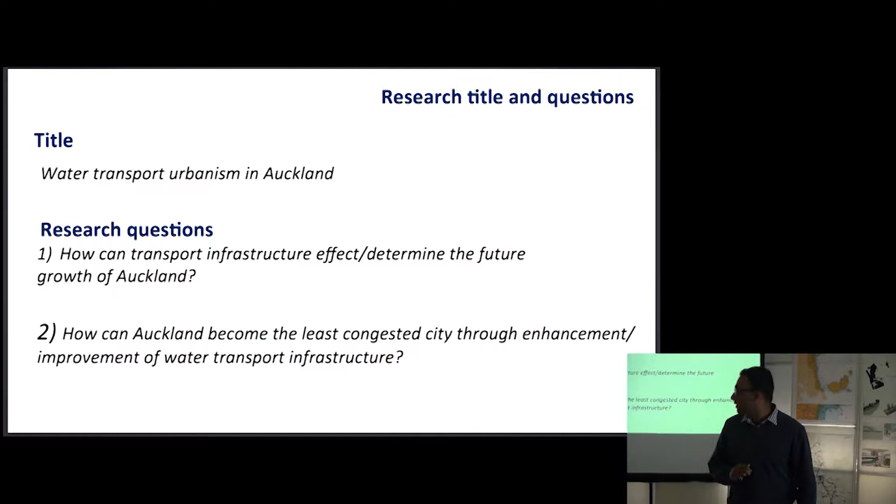My research questions are: how can transport infrastructure determine the future growth of Auckland, and how can Auckland become the least congested city through enhancement of water transport infrastructure.

This project aims to gain knowledge about Auckland's infrastructure network, to understand the future growth of Auckland, to find relevant precedents, to develop a methodology using network analysis, to analyze the coverage of transport, to design a speculative water transport technology for the Auckland Gulf, and to design a new transport network plan for the site.

Let's look at the reasons why this research is necessary. Auckland is located in the North Island of New Zealand. It's the most populous urban area in the country, with a population of 1.4 million, which is 31% of the nation's total population. It contains more water than land, and it's one of the most livable cities in the world.

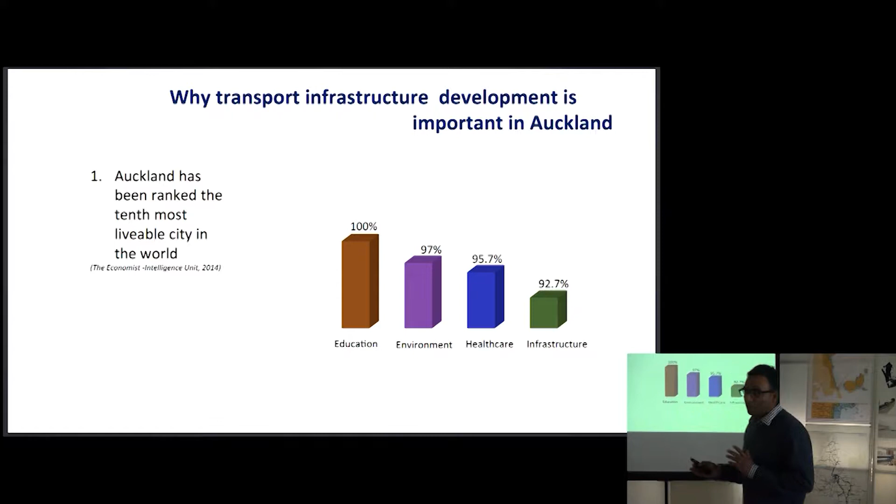Auckland has been ranked the 10th most livable city in the world. The Economist Intelligence Unit released its report on 140 cities, and for the 5th time in a row, Auckland was in the top 10 in 2014. Auckland scored a perfect 100 for education, 97 for environment, 95.7 for healthcare, but only 92.7 for infrastructure. Due to this, Auckland is behind 9 other cities.

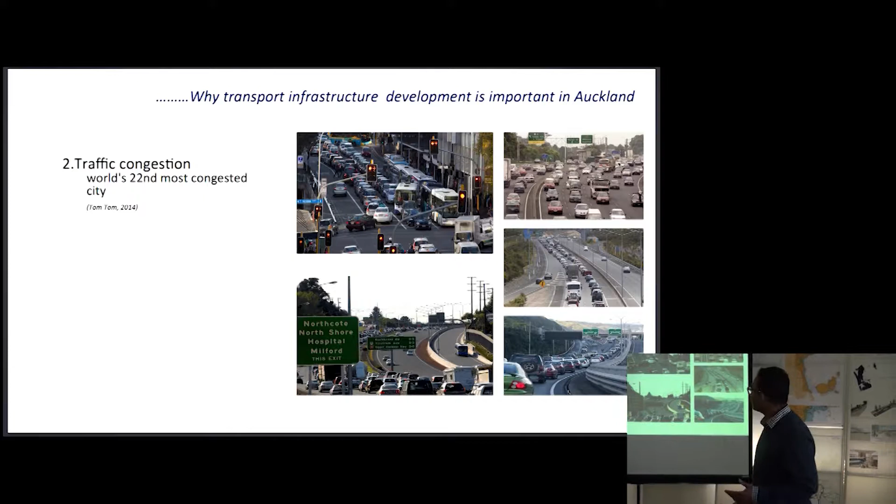The second reason is traffic congestion. In a 2014 survey of over 138 cities across 6 continents, vehicle navigation firm TomTom found Auckland to be the 22nd most congested city in the world. A driver who commutes 30 minutes a day faces 89 hours of delay every year going to and from work.

The third reason is poor transport network in many rural and coastal areas. The fourth reason is the Auckland Transport Plan—page 42 indicates that the future role of ferry services within the new network is in need of further review.

So I have found some methodology to address this problem. My methodology at this stage includes: literature review of different theoretical views, case studies of relevant precedents, stakeholders' current and proposed plan review, site selection of the potential site, and design of the site with reflection.

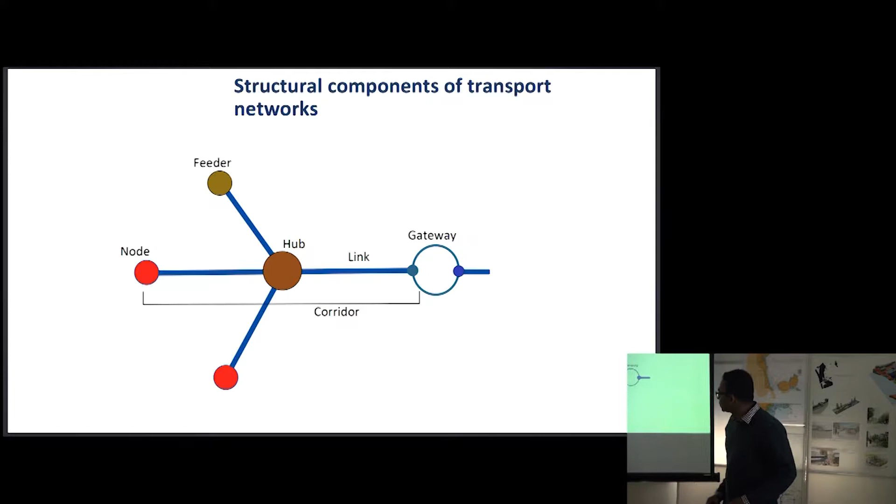Transport can also be studied from a network viewpoint. Before looking at Auckland's current transport pattern, looking at network theory makes it easier to understand Auckland transport from a network viewpoint. This is the structural component of a transport network: feeder, hub, gateway, and corridor are part of the structural components beyond the nodes and edges.

At the same time, random and scale-free networks are quite popular in transport. These are utilized when transport forms a complex network. Random networks mean a fixed number of nodes connected by random edges, and as they involve more edges and nodes, growing from small to larger, it's called a scale-free network.

There are 3 general network models: centralized, decentralized, and distributed. Centralized networks concentrate the power in one individual unit. Unlike centralized systems, decentralized systems distribute the power among many units. The distributed network has no center point—it doesn't depend on a center, which is the major advantage of this network.

Now it's easy to look at Auckland transport from a network viewpoint, since we've already covered the theories. These are the places where all the nodes and edges are located under the current and proposed 2018 and 2025 transport network.

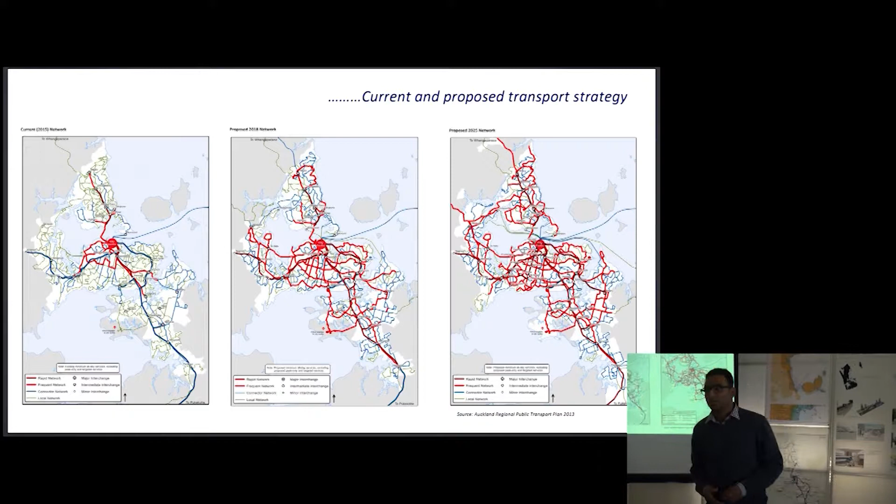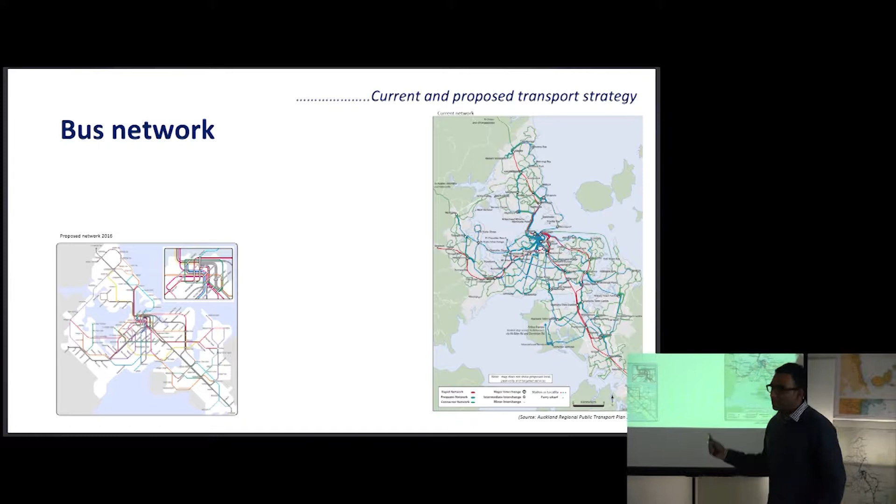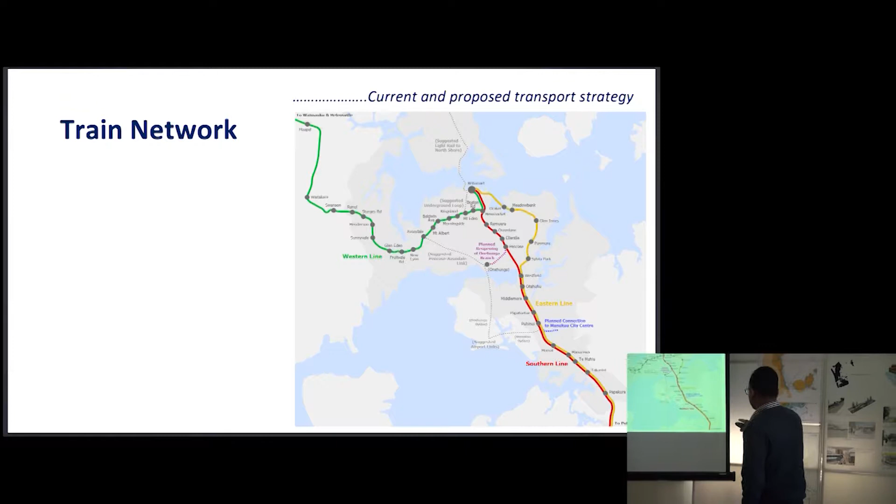The bus network takes the leading role in Auckland public transport. It's formed with 13 major interchanges, 24 intermediate interchanges, and many minor interchanges. The second biggest public transport system in Auckland is the train, formed with 48 train stations all over Auckland, including 16 train stations from Papakura to Britomart.

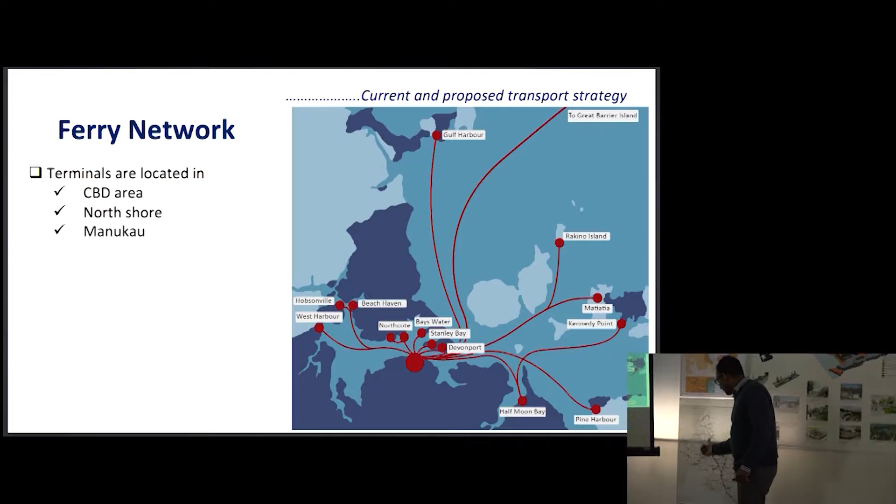Ferry transport development, or water transport development, is the priority over other transport development. There are many reasons behind it. First of all, Auckland is a linear city surrounded by water. It contains more water than land, so creating more nodes through water transport is practical and appropriate.

As Duany says, trying to cure traffic congestion by adding more motorways is like trying to cure your obesity by loosening your belt. The second reason is the booming demand for future ferry services.

For example, Half Moon Bay and Devonport ferry terminals. The third reason is that many cities around the world are successful in water transport. Therefore, I have been looking at how water transport has been handled around the world. Good examples are Sydney, Australia, San Francisco, USA, and Vancouver, Canada. These places have many similar conditions to Auckland, and they have grown through water transport infrastructure.

In particular, Sydney is the main business city of Australia. The only practical way to travel around the CBD area is by ferry. Therefore, ferries carry 14.7 million passengers every year. Successful water transport drives healthy urbanism as well.

Let's have a look at my design method. My design method will adopt many network models and theories. It will also take into consideration the existing ferry and other transport networks, potential sites for new ferry terminals and residential zones, EVs, and stakeholders' proposed plans.

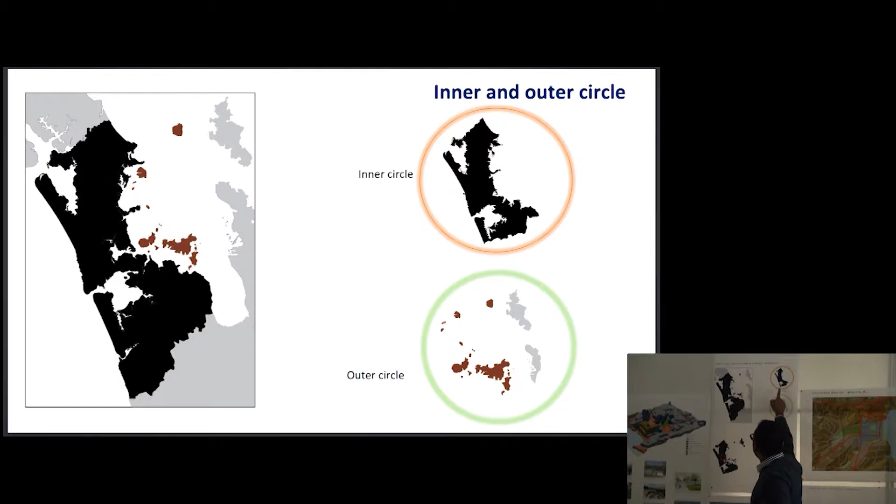My design is going to be under 2 zones: the inner circle and the outer circle. Places that have direct land connection with the CBD area go under the inner circle. Places separated by water go under the outer circle.

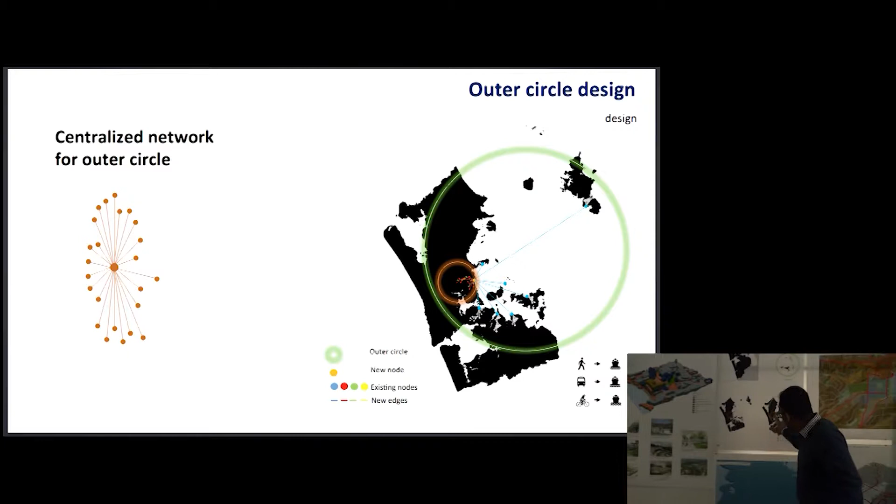As I mentioned earlier, when a smaller network needs to be expanded into a larger network, a scale-free network will be utilized. Therefore, scale-free network is the tool for the inner circle. The outer circle only focuses on connecting new ferry nodes with existing ferry nodes, so a centralized network is the tool for the outer circle network.

When our network gets wider through water transport infrastructure, equilibrium will be created in most cases. Equilibrium means more route options for passengers.

My site selection has been finalized after analyzing many things, including the general and special requirements for a ferry terminal and the stakeholders' current and proposed plans. Browns Bay is my site. This is one of the suggested ferry terminal locations by Auckland Transport and Auckland Council. It is located in North Shore and close to Albany as well. It has all the potential to grow into the biggest city through transport enhancement.

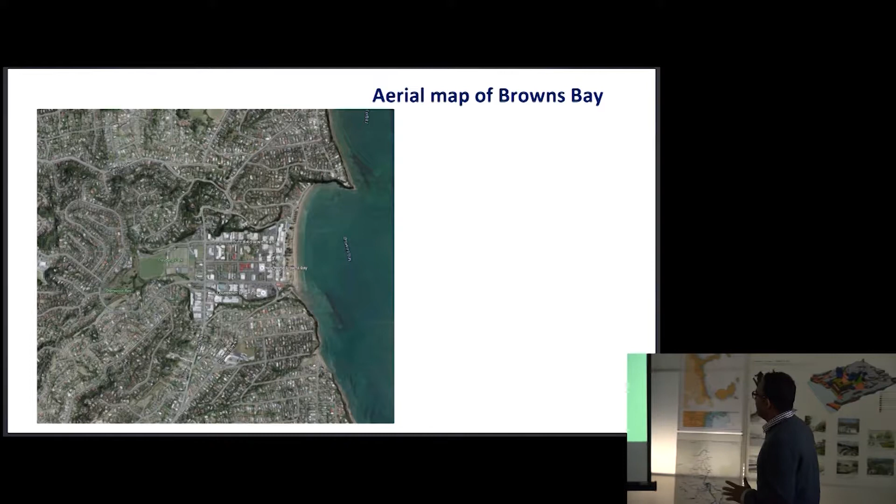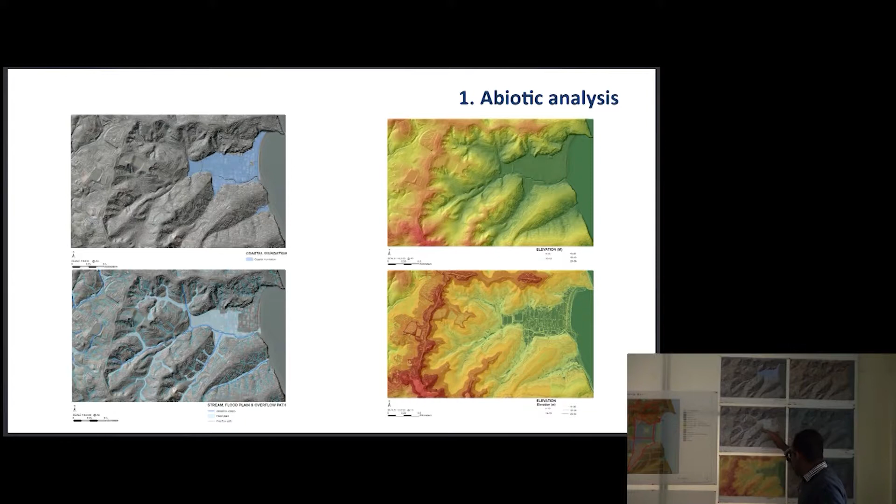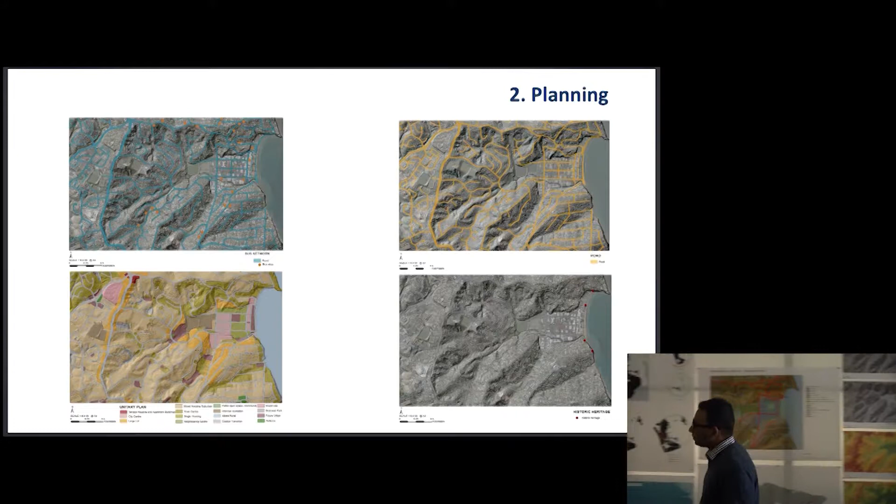This is the aerial map of Browns Bay. Site analysis of Browns Bay has been done under 3 categories: abiotic, planning, and social. Under the abiotic category, coastal inundation, hydrological catchment, and elevation have been identified. Under the planning category, road, bus network, historic heritage, and the unitary plan have been identified. Under the social category, house and family type and industries have been identified.

After analyzing these 3 categories, it was possible to understand many facts about Auckland. In particular, after analyzing the abiotic and planning categories, it was clear there are no major or exceptional challenges for this project. Also, there's a nice, flat surface available for ferry terminal development.

As I mentioned earlier, there are many general and special requirements for ferry terminals. In particular, ferry terminals should have sufficient space to make the terminal safe, functional, and operative.

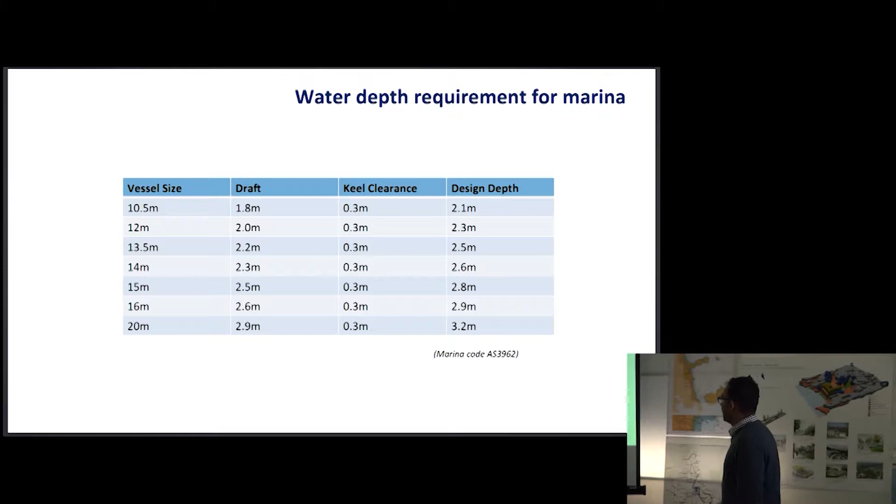The second requirement is a deeper water channel. Under the Marina Code AS 3962, a 2.1 meter deep channel is required for 10.5 meter smaller ferries, a 2.6 meter deep channel for 14 meter medium ferries, and a 3.2 meter channel for 20 meter larger ferries.

Browns Bay has suitable conditions, including a suitable deep channel for ferry terminal development, which is a major plus point of this site. Two tracks of 2 to 10 meter deep channel have been identified. The identified channel represents the minimum depth of the sea at all times.

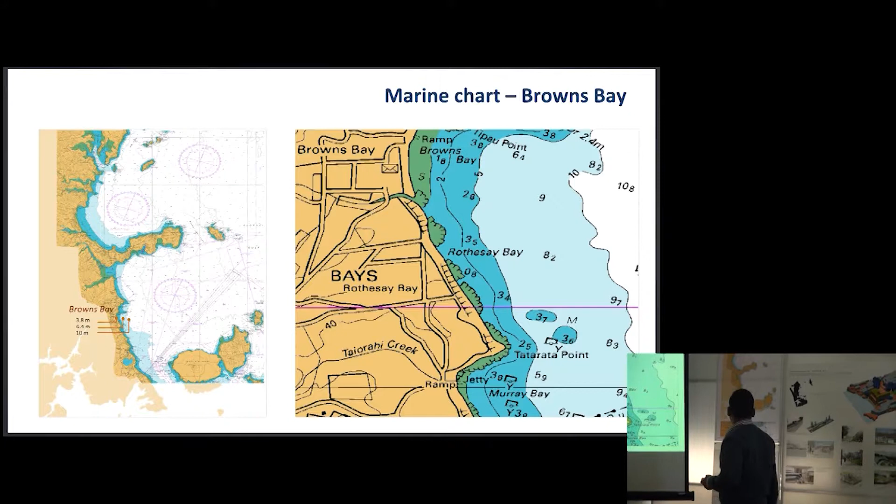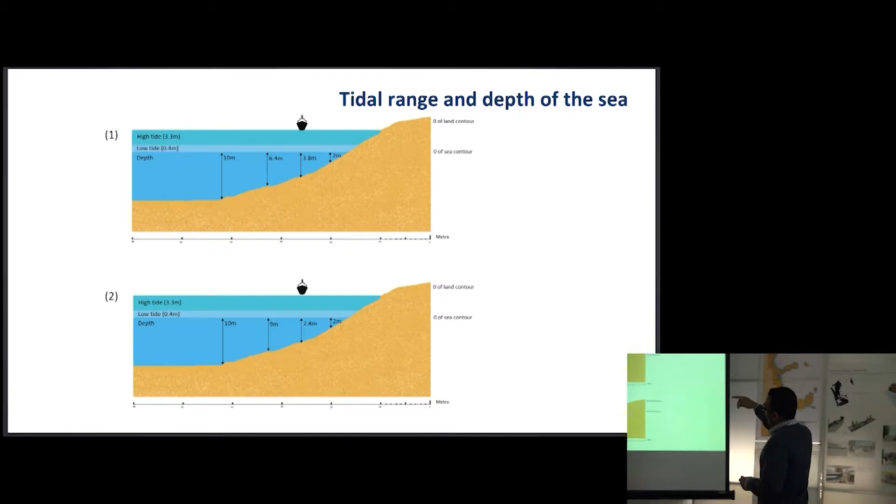This is because the zero value of the sea contour and the zero value of the land contour are different, starting from different points, as shown in the image. Therefore, the identified track is the minimum depth of the sea at all times.

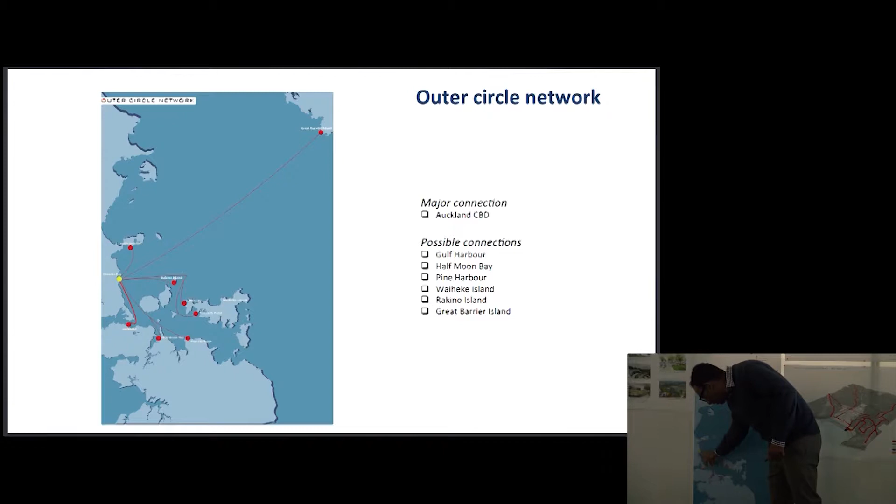New transport design has been done, accompanied by a new zoning map. This image shows how new transport creates a new transport network. As shown, the Browns Bay ferry terminal can have direct, 24-hour, and frequent services with the Auckland CBD area.

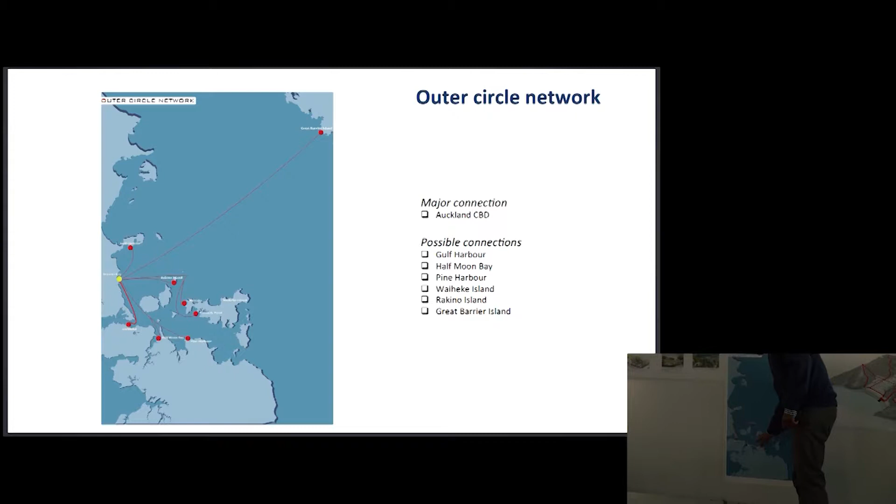At the same time, Great Barrier Island, Gulf Harbour, Rakino Island, Waiheke Island, Pine Harbour, and Half Moon Bay will be connected.

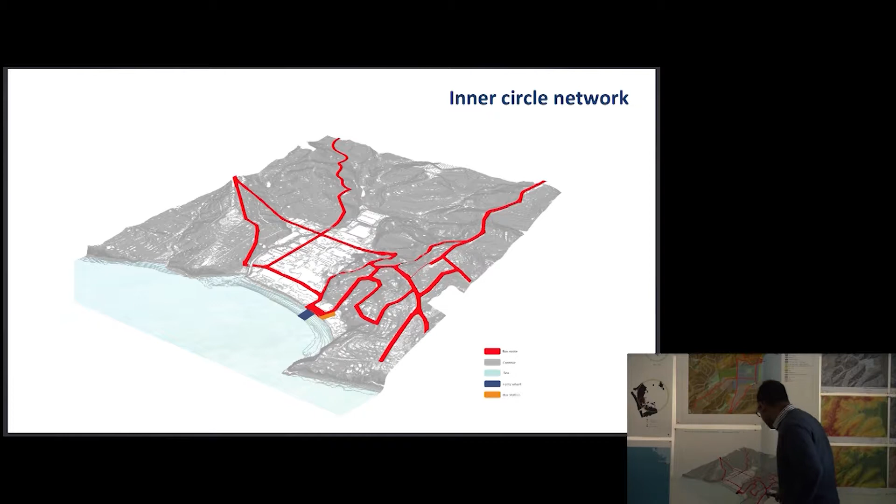Inner circle will control the passengers' mobility of the outer circle as well. In terms of Browns Bay, the beach road will cover the north side network, as well as part of the network of the south side. At the same time, Glencoe Road will have indirect connection with East Coast Road, and Clyde Road will cover the west side of the network. When inner circle and outer circle are connected together, a strong and reliable network will be created.

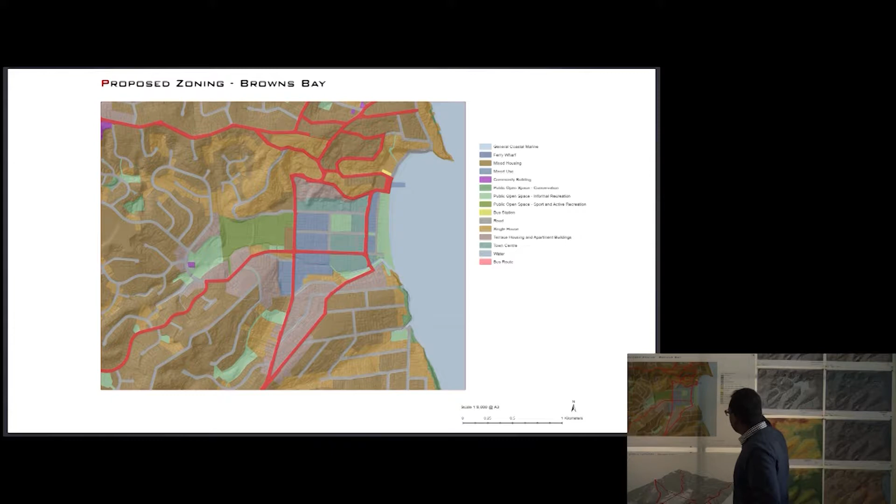Therefore, it is necessary to look at a new zoning plan to see what kind of changes could happen in the urban pattern of Browns Bay. Ferry wharf, mixed housing, mixed use, community building, public open spaces, bus station, roads, single house, terrace housing, and town center have been designed.

While designing this zone, landscape features, hydrological catchment, current and proposed plan have been taken under consideration. Also, this zoning will be aiming to create a city while maintaining what already makes this place special, in particular, green spaces and parks, for example, a beachfront linear park and landscaping design.

Also, this beach area has been covered by landscaping elements which can create a sustainable blue-green urbanism. The surroundings are going to be single housing with a maximum height of 8 meters. And this is the town center with a maximum height of 40 meters. The surrounding area is going to be mixed use, which has 24 meters of maximum height. And this area is going to be terrace housing, which is a high density area of Browns Bay.

The slope area and the area with less influence from the town center are going to be under the mixed housing zone. At the same time, under the unitary plan, these areas have been allocated for single housing, and some slope areas have been allocated for mixed housing.

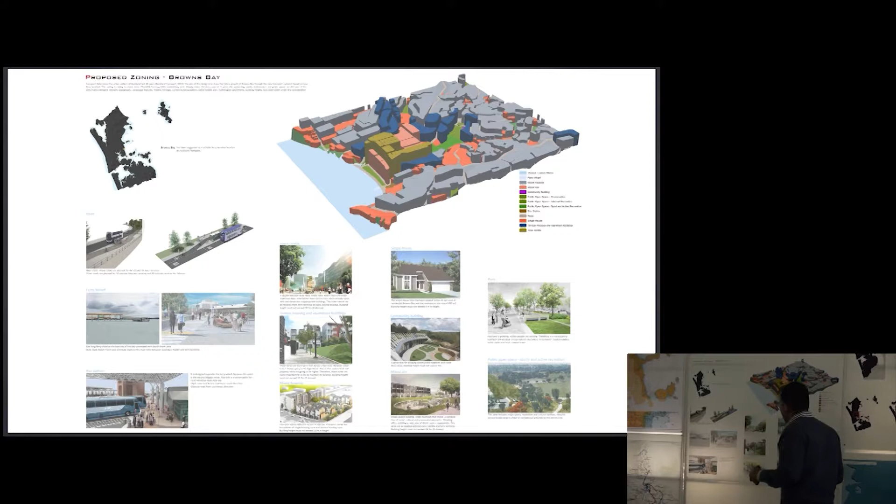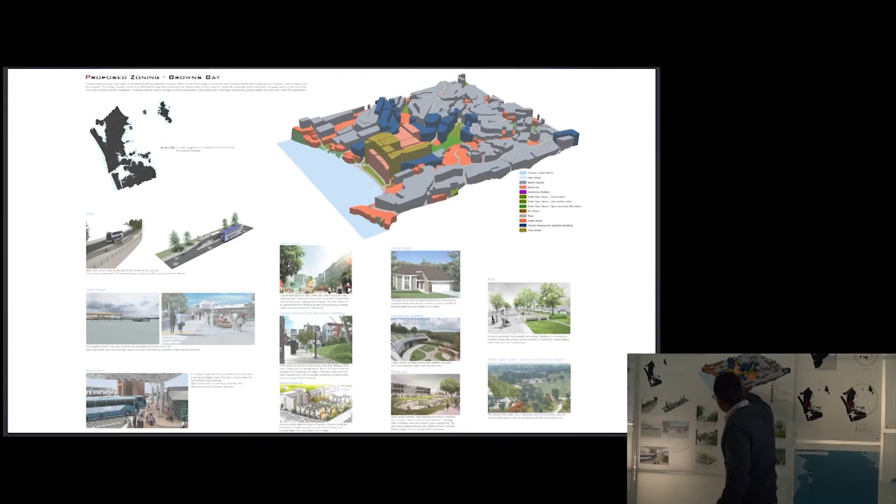At the same time, this bus station will be the main feeder for the ferry terminal. Also, the capacity of this bus station can be extended in the future as its surroundings have suitable conditions for land development. Also, passengers can easily walk to the ferry terminal and town center because it's a nice, flat area.

And there are many direct and indirect benefits behind this project. One of the least congested cities and water transport urbanism are the direct benefits. And beach lifestyle, easy transport access, and affordable housing would be indirect benefits.

I would like to explain about the next step of this project because I have another 6 months to submit my thesis. Before I submit my thesis, I would like to compare and contrast my zoning with the Auckland Council plan. We'll make a mass model to illustrate the spatial quality of the zoning or proposal plan. And then I will make a conclusion to apply this technology to other parts of Auckland as well. Thank you.

Okay, who'd like to lead off? I've got a few questions.

Thank you, it's a very clear presentation. You've done a huge amount of work to ground the project, and it's really impressive to see that. It's a really compelling focus, the idea of water urbanism and a transport network via water just makes so much sense, obviously, for Auckland. I'm interested in your research questions, particularly, how can a transport infrastructure determine the future growth of Auckland? I just wonder if you could speak to that a little bit more.

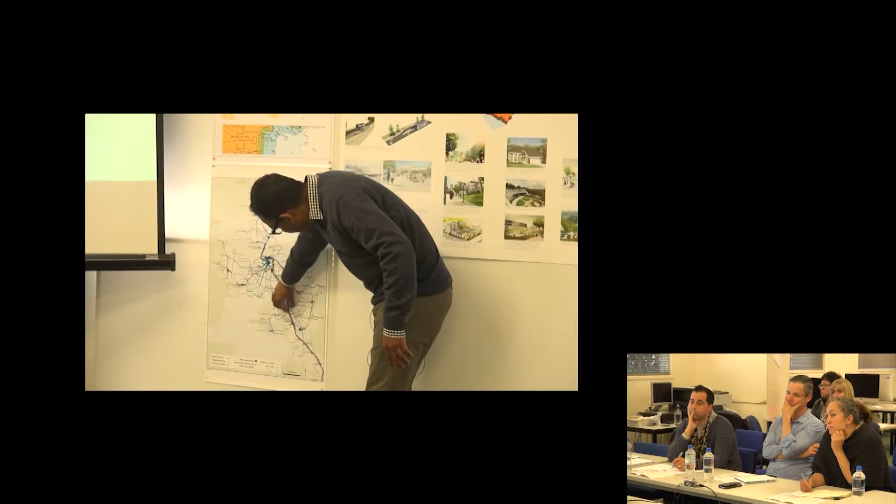How can it determine? Yeah, the thing is, over the last 40 years, roads determined the urban pattern of Auckland. Even the Auckland Council plan says that this has been happening for the last 40 years. So wherever roads go, urban growth happens, and urban sprawl happens because the transport network is not wider, it's in a narrow space. If you look at this place, all the major interchanges are located here. Wherever major interchanges are located, the places have grown up. The rest of the place is low density area, and urban sprawl happens there.

So when the network gets wider, people will start moving over there, and affordable housing would be there. If you can travel by 20 minutes to the CBD area, most people don't want to stay in the high density area. They will go and stay in a beach lifestyle, and they will come and go to work. So you think that the water infrastructure, the transport infrastructure, can be a determinant of urban form, really?

Yeah, because Auckland is a linear city surrounded by water, so it's easy to create water transport. If you look at San Francisco or some other areas I mentioned before, they have grown up like that because they have a coastal area around. So when you add more nodes, otherwise if you create more motorways or more roads, more driving, you create more urban sprawl. So if you create more water transport, then you will create sustainable and more walkable communities.

So you make a kind of urbanism that's attached to the coast, that becomes sort of densified along the coast edge.

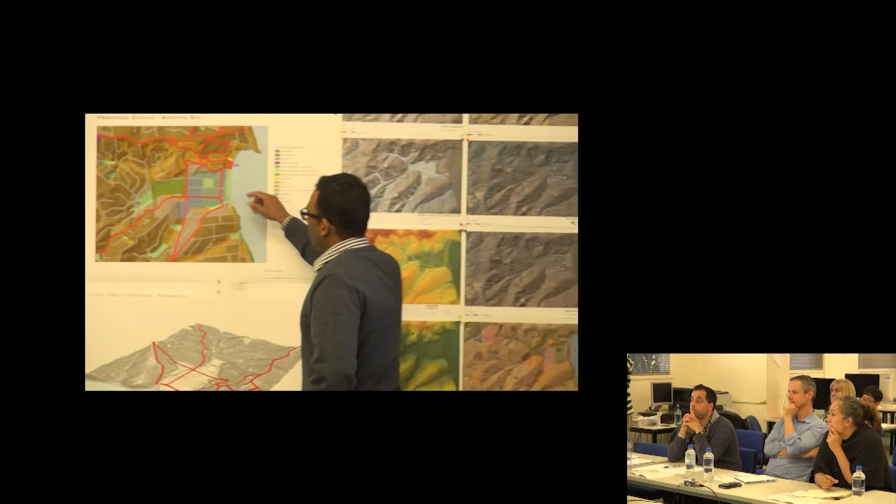Even if you look at this area around Browns Bay, people can easily walk, and a more sustainable community will be created. But if you create more roads, you get urban sprawl again, more building, and the same thing happens. No one will move around, because when urban sprawl and traffic congestion happen in this area, people have to come from outside and you get the same scenario again. You'd have to get ready for work 3 or 4 hours before. But if it's water transport, you can easily come here.

I think you've got a really great variety of very careful analytical drawings. It could be really useful for the project, in terms of your question, to do a drawing that's a kind of radicalising, future-focused scenario drawing that captures that concept - one that speaks to how, at its most radical, this water transport system can create this water urbanism, this densified edge. That kind of image would really help speak to what's potentially a really radical concept underlying this project. Yeah, really interesting, thank you.

I think you should write for the Auckland Transport blog. I think you'd be very good on that side.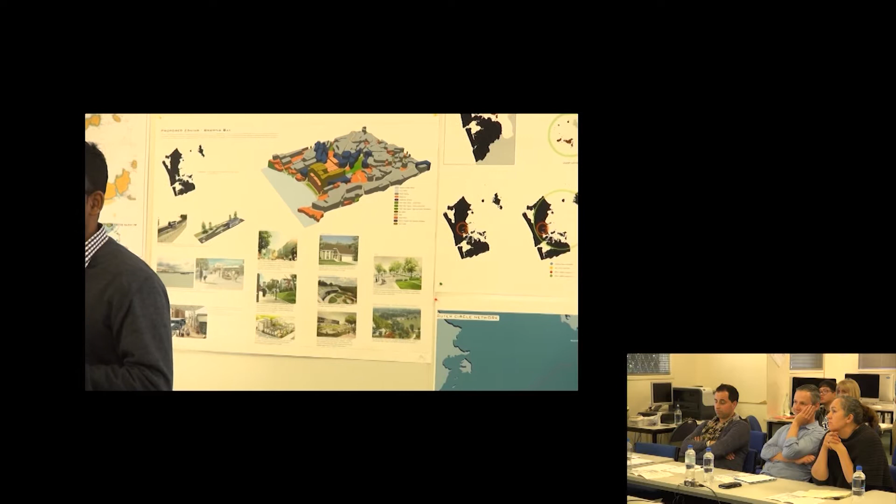In your point of view, that's right - the green spaces and sustainability are things we really need. But the thing is, Auckland is growing, a million people are arriving. So it's not your fault, it's not my fault, but it's a fact - Auckland is going to grow. So we have to be able to accommodate more people somehow. We have to think sustainable plus more accommodation, or something like that.

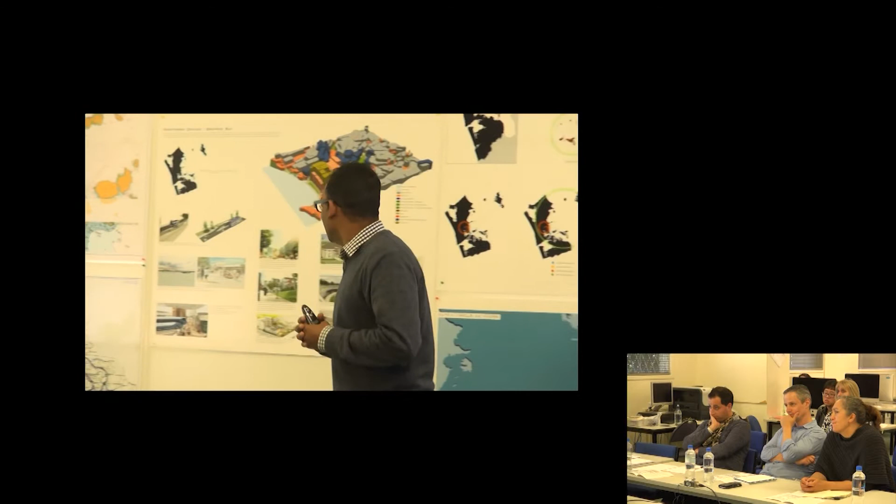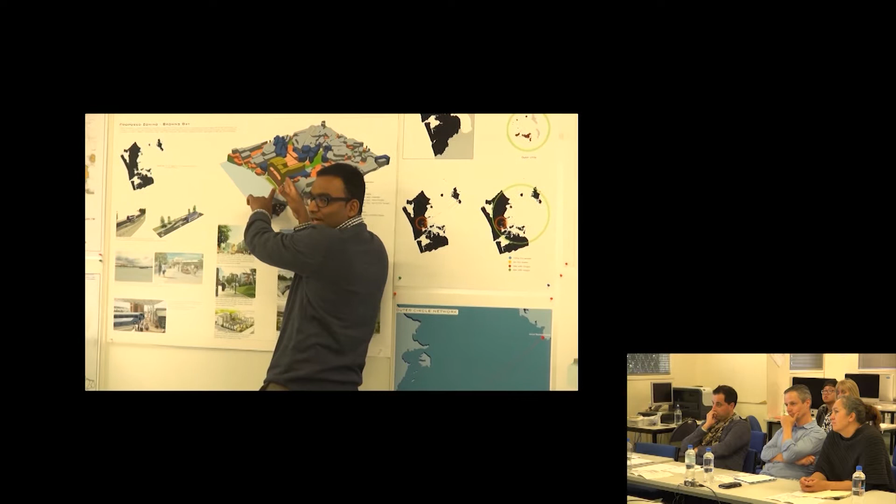The more challenging urban design, like with green elements, with the green spaces, you have to create a design. So only this area, it's a smaller place, just behind the beachfront lane. It's gonna be cafe and restaurant, still gonna remain, and the rest of this area is going to be like the town center.

Also, as you're responding to us now, just exploring that idea of amenity, which a node should all be about. The classic example in Auckland is Britomart, the amazing success that's turned into recently, and what a transport node can be. So it's great that you're exploring that.

I'm going to make a massing model again, so I will consider this idea as well, like how big the town center could be or something like that.

I'm his supervisor, you should know what is the maximum height according to the Auckland plan. I think in Browns Bay it's 32 or something. Oh is it really? Yeah, 32.5 they indicate. No, that's good to know, I'm surprised about that.

It's probably 32, contested, I'm sure that's probably some grandfathered thing. But also under the unitary plan, they allocate all the slope area for single housing. In terms of this plan, we just want to maintain the topography, a good-looking topography. Therefore the surrounding is going to be the single housing area, next to the hostel area, and we avoid high building structures or something.

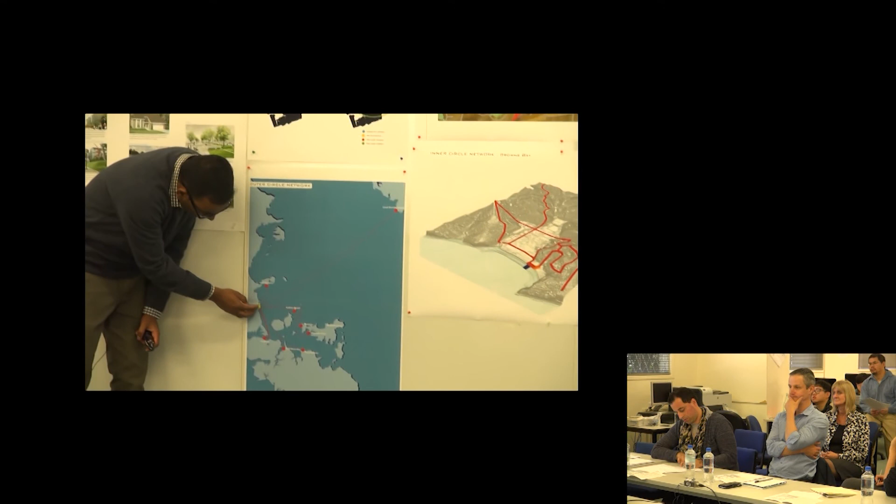That's my question—you can live on Waiheke and work in Albany. Also, Auckland suggested another ferry terminal at Takapuna. So even in the future, it might link with here, something like that. You don't need to go all the way to Takapuna like this—you can go like this in 10 minutes.

That also has this kind of idea of a polycentric city—not everyone's going into the centre. Maybe you're going to work on Waiheke, or maybe you're going up to Gulf Harbour for work, or to Albany.

For example, if you look at Sydney, the connection with Manly and those areas is frequent. Those sorts of transport links can also encourage tourism in the future.

So I definitely think that drawing could get a bit richer and more expressive of some of those ideas you just explained—I couldn't quite feel it. So yeah, next time we'll change it.